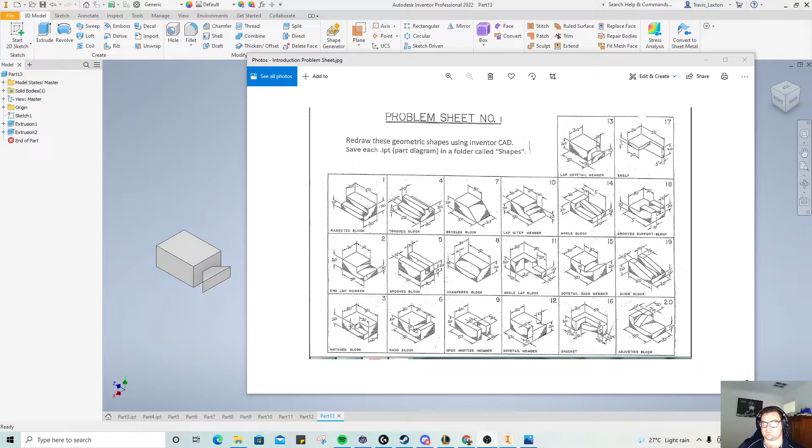Okay, so now we're moving on to number 14 here, and this is a very different shape. So what we're going to be doing is making a side profile and then cutting some stuff out of it.

Up here to new, top left, metric, standard millimeters, double checking those like always. Starting a 2D sketch, clicking on the top plane and then rotating that around.

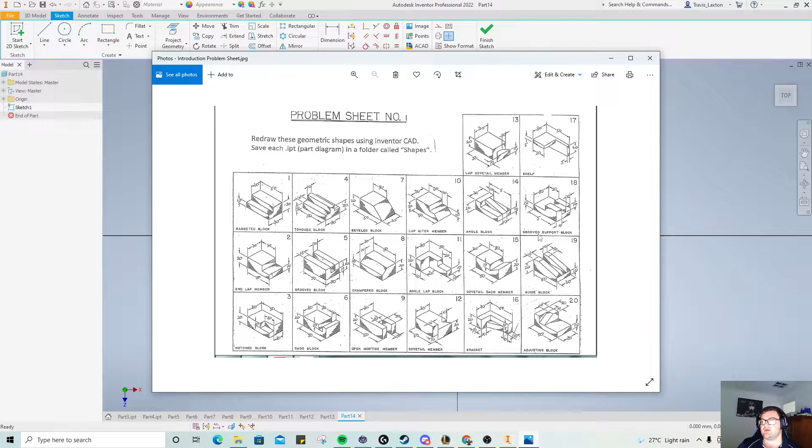Now we're going to be making this L shape, and then we're going to be making this part come up, and then we'll cut that angle on it, which will be good for the test ones. Number 20, number 19, and number 17 are all good test ones for this. So if I bring this over here, out of your way, we'll start putting it together.

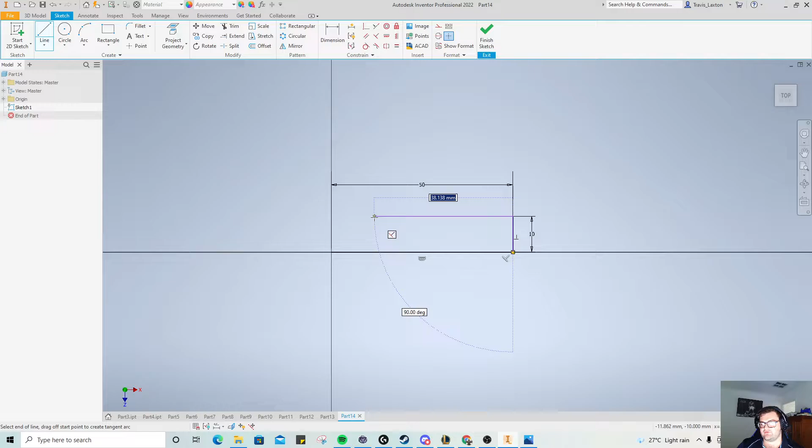So line, and the bottom line is 50 millimeters. I know it says 5 there, but that's a typo, so that's 50. And we can go up 10. And then we're going to go across, 10, so that's going to be 40. Up 10, I think. Yep, so up 10. And then across, and then down. And we've completed that L shape that we can now 3D model in the top left there.

Extrude, and we're going to extrude that 30.

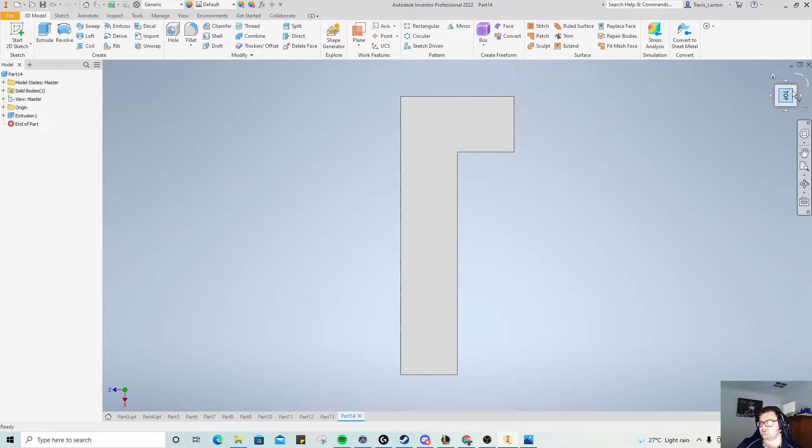Alright, so now let's rotate it around, and we need to draw that center part. So left clicking in the middle, selecting new sketch. There we go, on a bit of an angle. Actually, no, I kind of want it straight. So now we need to add that in the middle of it.

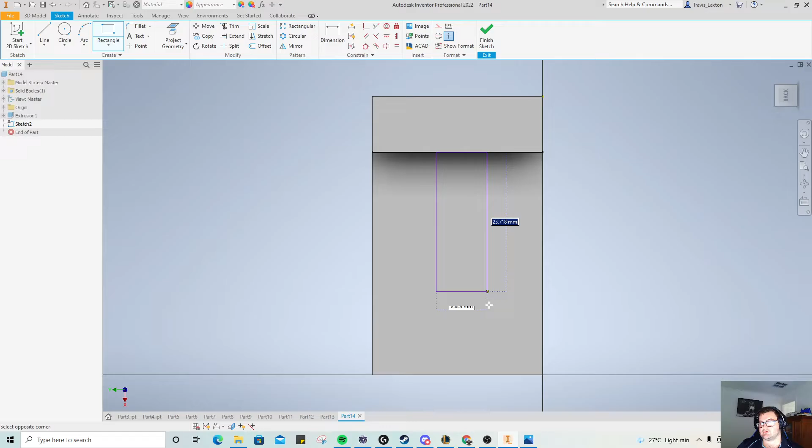So I could actually just select a rectangle tool, going off this line. We want it to be 40 and we want it to be 10. Whoops, control Z, let's do that one more time. So starting from here, coming down, we want 40, and then we press tab and we want 10, enter.

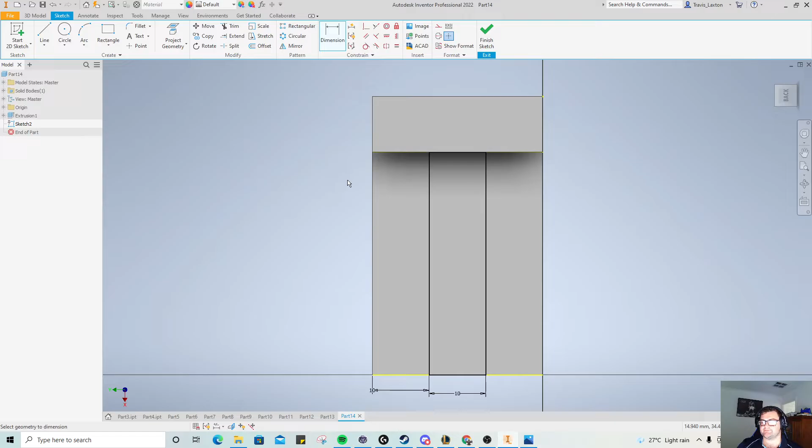Now one thing we can do here is make sure that we dimension it from the edge, because we know that it needs to be centered and this whole thing across is 30. So if we use the dimension tool, click on the corner, click over there and make sure that's 10, as it was 10 point whatever. Now we need to extrude this up 10, so 3D model extrude, and we're going to extrude up 10.

Now we've got our little center section. So now what we need to do is actually cut a diagonal on this, which is really easy because it goes from the top here to the bottom there. So left clicking on that piece that we've just made and new sketch.

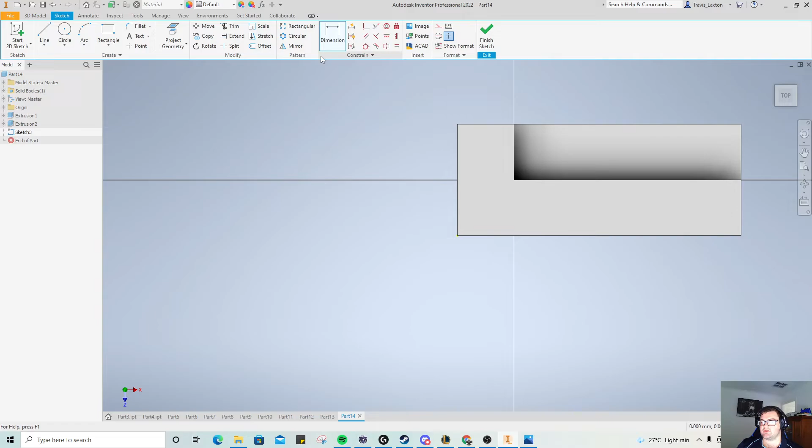So we can start off by using the line tool and getting that angle that we need first. And then all you're actually doing is tracing around the edge of this, because remembering what I said previously, it has to be a closed shape. Right click OK - it has to be a closed shape for it to be able to extrude in any way.

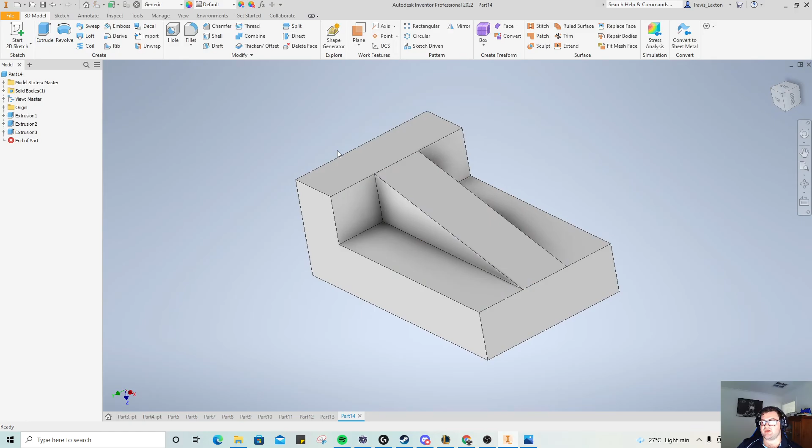So now clicking on that, and you see there it wants to come out 10. We actually want it to cut. Okay, and then it's cut out that angle. So now you can see there we've cut this out, and I can move this over. It's actually sitting in the perfect view for me when I bring this drawing over.

Whoops, but that looks perfect, exactly like that, and we can start moving on to number 15.